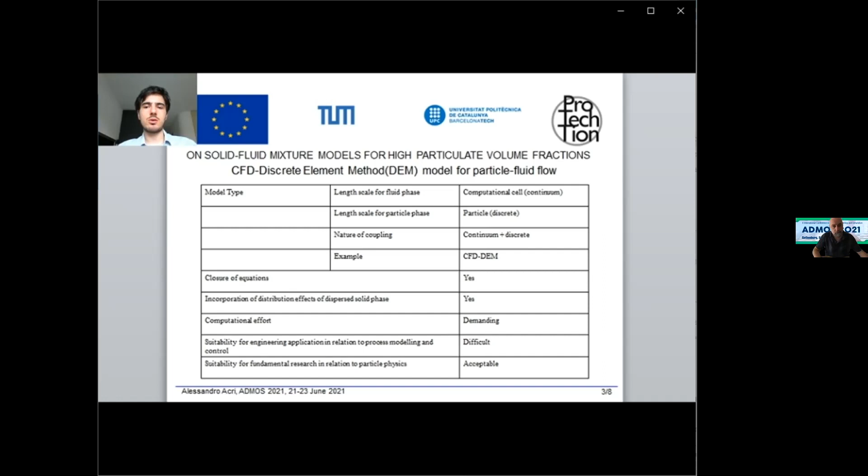In order to tackle this type of particle fluid flow problem, I've considered the CFD-discrete element method coupling model. This type of model considers the fluid as a continuum and the particles as discrete particles. It is a suitable model to describe the particle physics better than other approaches like the two-fluid method that considers particles as a continuum. Its computational effort is demanding, but less demanding than other approaches that consider particles as discrete particles. Therefore, it's a sort of compromise method.

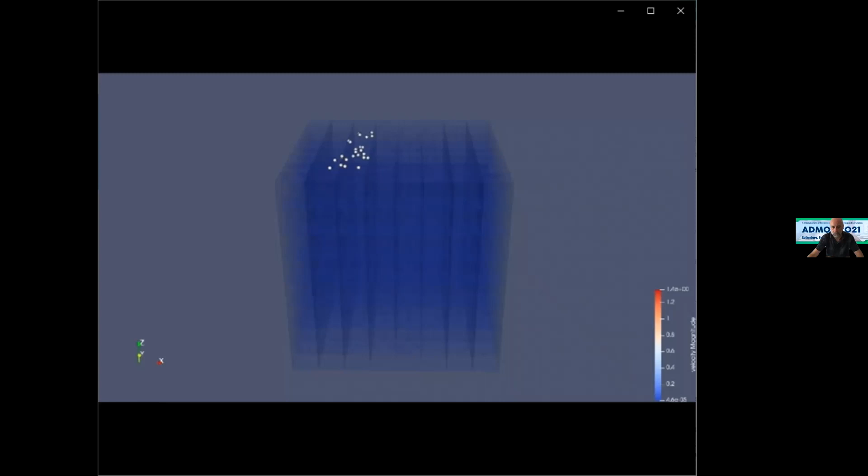Now I'm going to show you a brief video. In this video you will see how particles behave in a cubic domain, entering from the inlet, and we can see all the challenging aspects I've talked about, like the deposition of particles, the bouncing on the walls. We can see also how the contact between particles is performed, and the influence between particles and fluid. At a certain point, we see an increase of particles inside this cubic domain, resulting in an increase of particle volume fraction, which is also a problem. We can see this instability where particles are packed at the outlet, and then at the end we can see also the deposition of the particles.

Now we can go back to the presentation, and I'm going to present the conclusions I've reached so far and the outlook for the future. A CFD-DEM coupling approach to solve problems involving gas-solid mixture models is performed.

I've also performed a qualitative assessment, and we can see that the behavior of the particles is highly influenced by the fluid flow, as expected. I've also performed different scenarios that show how the approach can describe the particle physics.

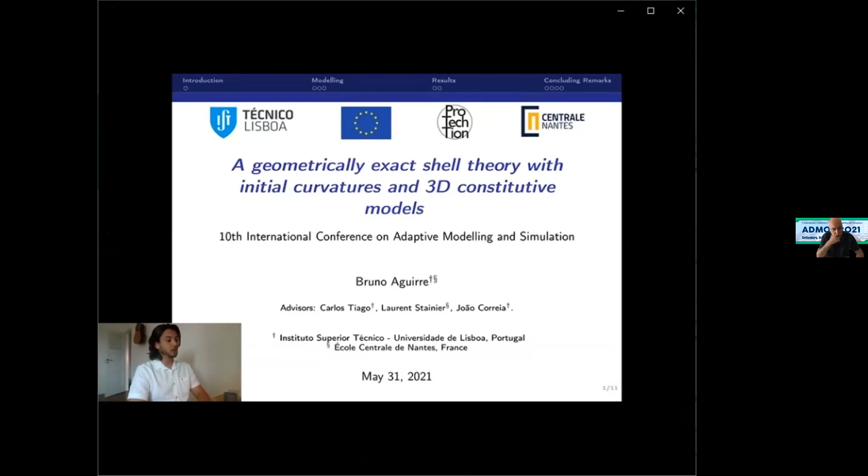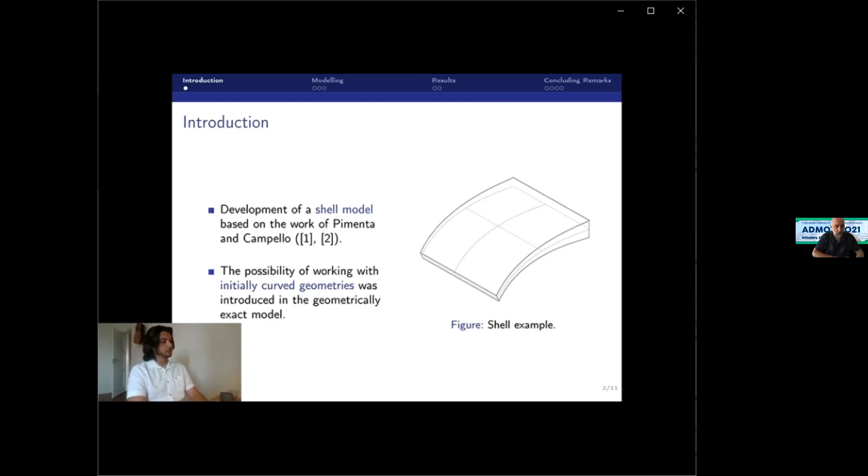Pimenta and Campello, back in Brazil at the University of São Paulo, developed this shell model, which is geometrically exact and also has thickness variation. We introduced the possibility of working with initially curved geometries, which was not possible before.

This new feature is implemented by the introduction of a new initial configuration. Using this initial configuration, we create a flat reference configuration where all the calculations are performed, because it's easier to work with a flat geometry in this case.

We have a mapping between the reference and the initial configuration of Kirchhoff-Love type, so basically the rotations are completely coupled with the basis. The total mapping is of Reissner-Mindlin type, and of course it includes thickness variations.

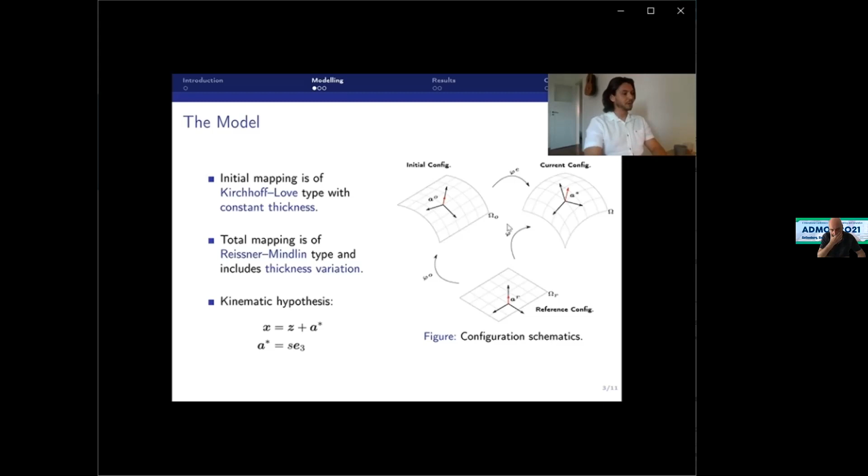The kinematic hypothesis is described by these two equations here. X represents the position of the current configuration, where Z and A-star, respectively, are the midplane position and the position of the director. The parameter S in the second equation controls how the thickness varies in this problem.

Here are some important model details. Of course, it works with large strains and it's geometrically exact. The rotations are parameterized with the three-parameter Euler-Rodrigues formula, which is interesting when compared, for example, with quaternions, where you have 4 parameters. The thickness variation is controlled by a quadratic equation.

You're going to have a linear and a quadratic term controlled by two parameters, P and Q, which are the degrees of freedom, and they are responsible for two types of thickness variation. P is responsible for stretching and diminishing of the thickness of the midplane, and Q is responsible for the displacement of the midplane with respect to the thickness.

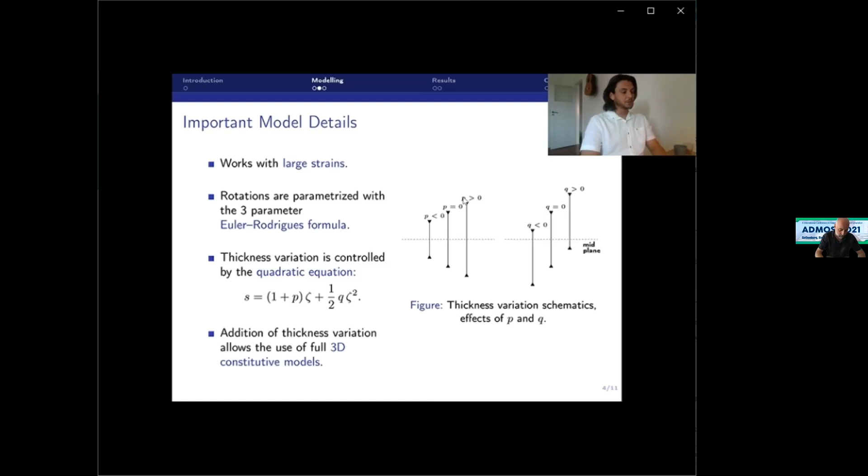One of the most important features of this model is that the thickness variation allows the use of full 3D constitutive models. Here are some implementation details.

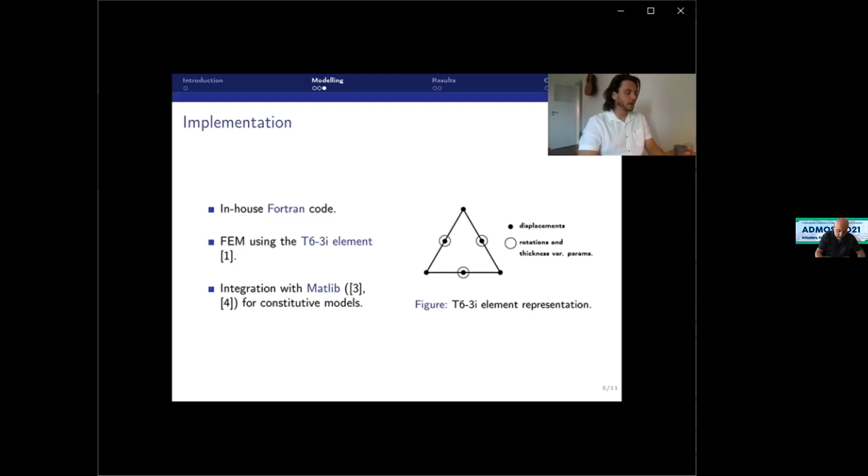The model is implemented in an in-house Fortran code, in a finite element context using the T6 3i element. This element is quadratic on displacement and linear on rotations and thickness variation parameters, to avoid shear locking. It's integrated with MATLib, a library developed by Professor Laurent Stainier, which has a variety of constitutive models. Now let's see how the model performs.

We have this pinched cylinder example. We're going to use the viscoelastic Ogden-Ogden-type constitutive model. You can check this reference for all the details of the constitutive model. We'll also be using the same material parameters as in the paper, so it's easier to do comparisons.

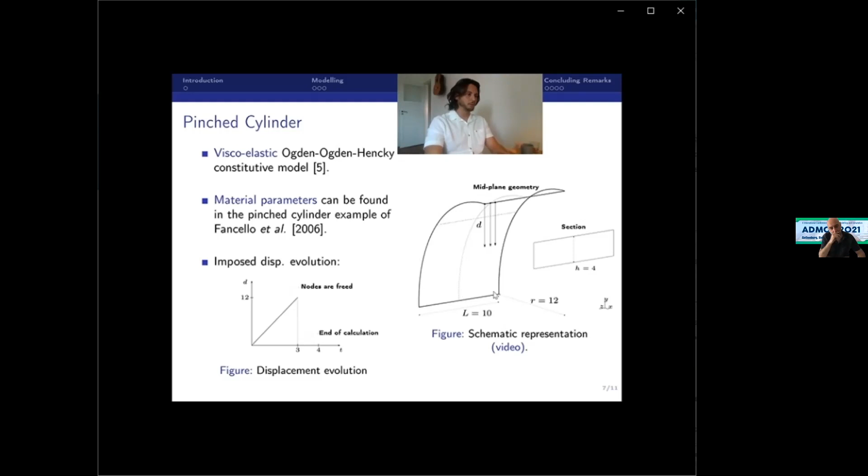This is the imposed displacement evolution. It's time dependent, evolving linearly until time equals 3, and then we free the nodes, and as a viscoelastic model, it should not go back instantly to the original position. This is the geometry here. We have symmetry conditions along this line and this line, so we don't need to solve the whole problem because it's symmetric.

So here is the video. As you can see, until time 3 the imposed displacement is acting. When it reaches time equal to 3, it releases and then slowly returns to the original position, as it should in a viscoelastic model.

So in conclusion, we presented a geometrically exact shell model which considers thickness variation and is able to work with initially curved geometries. The model is already implemented and is giving accurate results when compared with the benchmark tests.

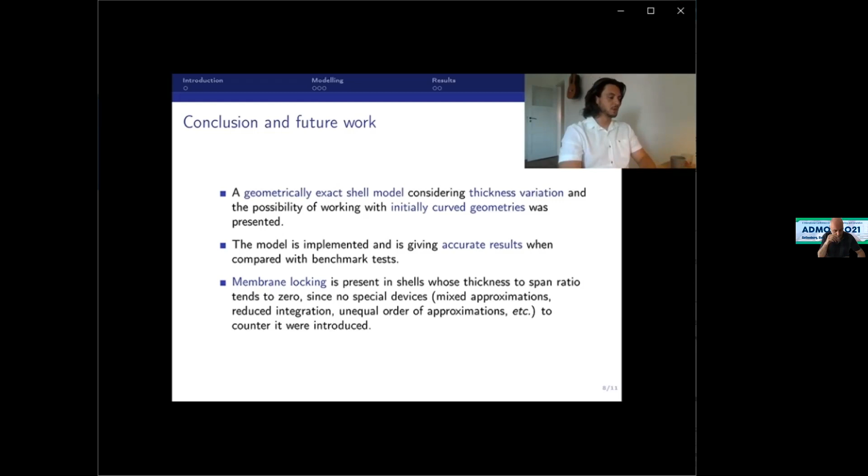As future work, there is a little bit of an issue of membrane locking, which is appearing in some cases, not all of them. Basically, this implementation doesn't have any special device to counter this kind of locking, for example, mixed approximation, reduced integration, or unequal order of approximations. So this would be an interesting future work.

Fluid structure interaction is a multiphysics type problem that earned increased attention during the last two decades. Several engineering applications rely on FSI simulations to solve different industrial problems in many fields such as aerospace, civil engineering, biomedical application, etc. Such type of interaction requires specific numerical methods to tackle different situations and might be computationally challenging due to the physics of fluid, nature of interaction between the solid and fluids, and structural properties and geometry.

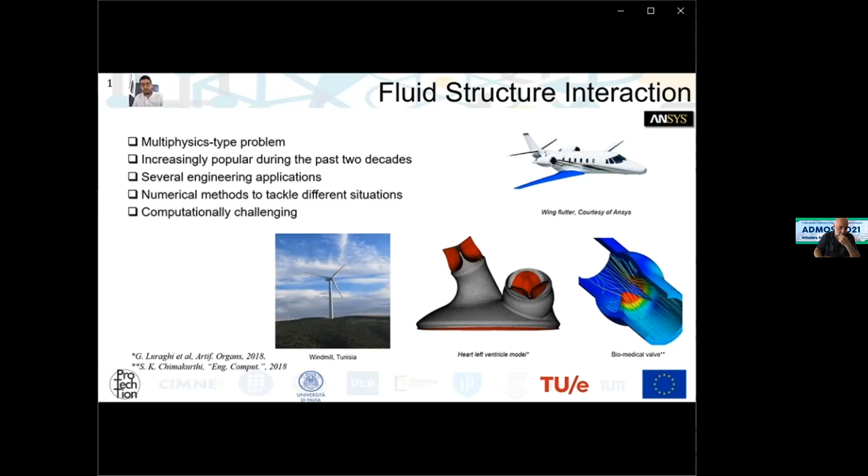In other words, FSI is problem dependent and generally needs fine-tuning with respect to the complexity of the task.

The partitioned approach is the most popular approach since it preserves the modularity of the participant solvers and allows independent setups that can be coupled using an intermediate coupling solver. This approach performs well when solving two-way fluid structure interaction problems with compressible fluids or low added mass effects.

However, it might be unstable for incompressible material coupled with soft, lightweight structures, which requires additional effort to obtain a problem solution.

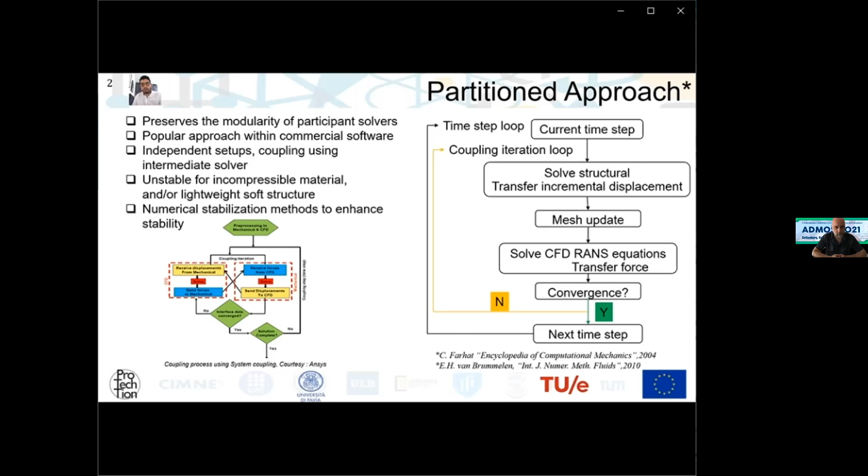This is the case of our valve under investigation, which is a two-stage pilot valve manufactured by our industrial partner Dolphin Fluidics, a company based in Milano, Italy. Simulating the operating condition, namely the opening and closing, is quite challenging because of the different non-linearities present within the system, besides the contact and the nearly closed configuration.

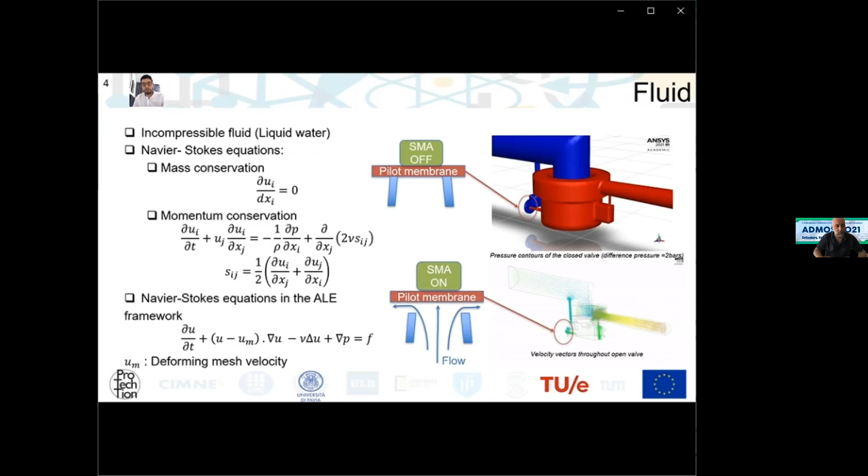We would like to solve this specific problem the hard way: assume an incompressible water flow governed by Navier-Stokes equations, which follows the arbitrary Lagrangian Eulerian formulation to allow the deformation of the fluid grid adjacent to the structure.

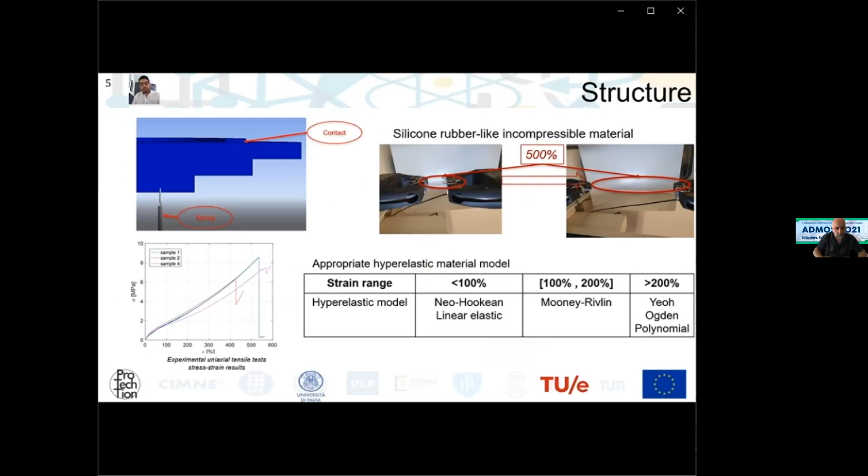The structure itself, which is made of hyperelastic silicone rubber, is modeled using the neo-Hookean hyperelastic material model and discretized using mixed formulation to account for volumetric and shear locking.

Traditionally, people solve partitioned FSI problems in an iterative manner using Gauss-Seidel fixed point algorithm. This method cannot deal with our specific model due to the high added mass effect and requires under-relaxation to stabilize the fluid acceleration. However, choosing the appropriate under-relaxation factor depends on the fluid to solid density ratio as well as the model specification.

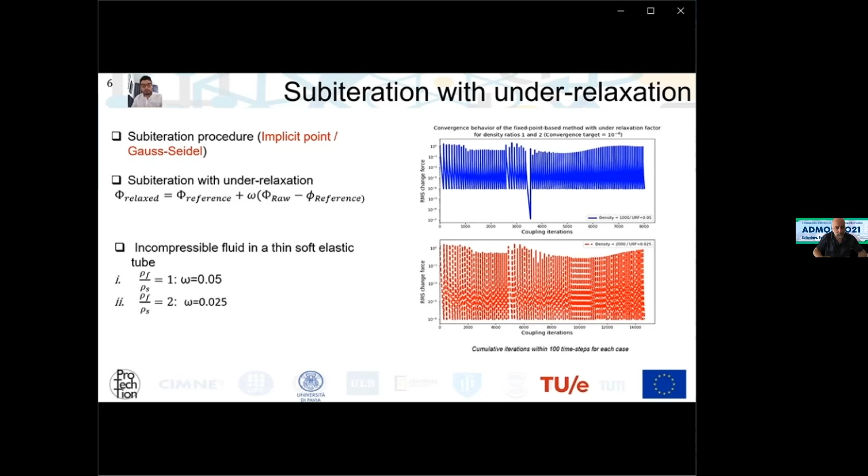Recently, the quasi-Newton method has been developed to tackle this specific kind of problem and has proven to be a robust and efficient way to couple partitioned FSI problems. It offers an alternative to Gauss-Seidel schemes and is based on the root finding method for black box solvers.

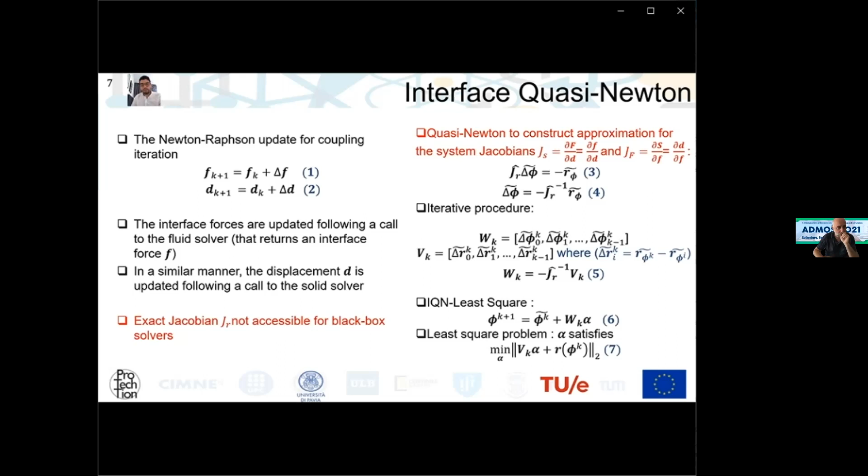This method does not solve the exact Jacobian of the Newton method explicitly because of the limitations of the black box solvers. However, it approximates the inverse of the Jacobian in an iterative manner until time-step convergence.

This method offers considerable acceleration to our simulation run compared to the sub-iteration with under-relaxation. It can also effectively deal with contact nonlinearities and tends to produce good results in comparison with the well-known exact Newton procedure.

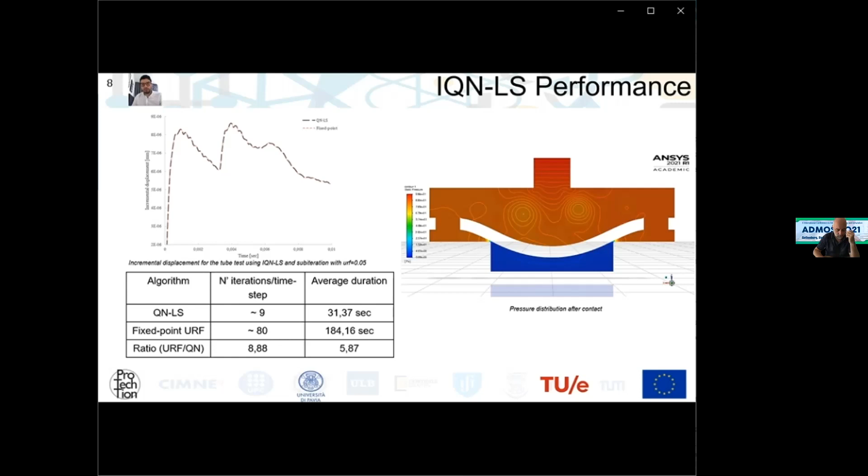Another method employed by some scientists, assuming artificial compressibility within each time-step iteration, has been an alternative to solve our model. In this method, a source term is added to the continuity equation of the incompressible fluid as a function of pressure variation. This pressure variation vanishes once the time-step solution converges.

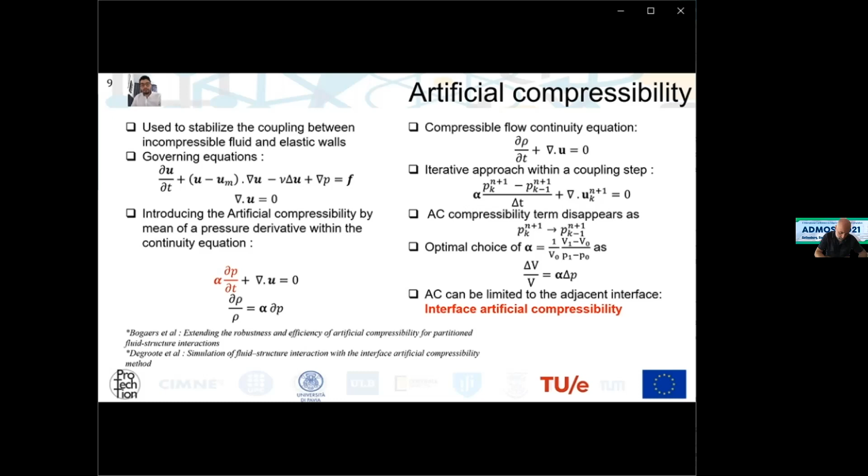This method can outperform the interface quasi-Newton least square method in some situations. It can also be limited to the adjacent wet interface to become interface artificial compressibility.

To conclude, fluid structure interaction simulations have become increasingly popular in engineering applications. However, it's very problem specific and requires fine-tuning to deal with challenging bottlenecks like added mass effect and nearly closed system for incompressible fluids. Stabilization methods have been introduced to deal with these challenges, like sub-iteration with under-relaxation, interface quasi-Newton method, and artificial compressibility.

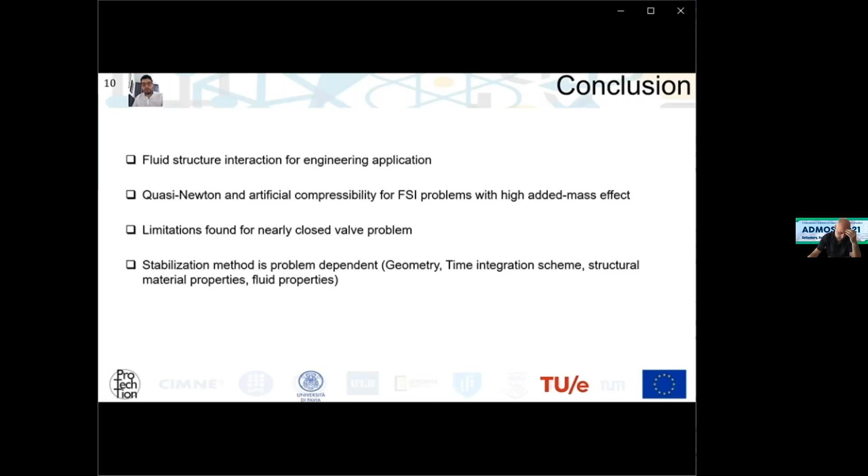Additional efforts are still required to deal with different sources of nonlinearities and need a proper understanding of the problem specifications. Finally, I would like to invite you to check out the extended version of this talk in Scipedia for your consideration. Thank you very much for your attention.

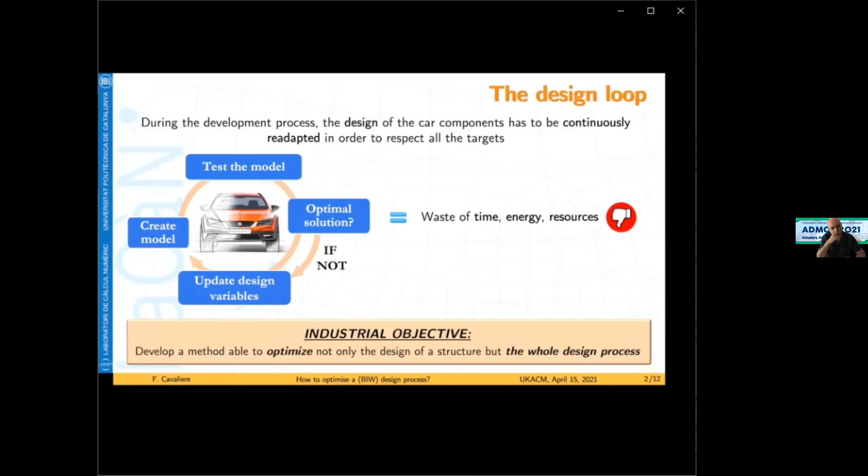Hello everybody, I'm Fabiola Cavaliere and I'm a PhD student. With my project I'm trying to understand how we can efficiently design a new car. The design process is the most time-consuming part of the whole project because it needs a lot of iterations until the best solution is found. This of course represents a waste in terms of time, energy, resources, which is the reason why the industry needs to optimize the design process itself.

In my project, I'm focusing on one target specifically, which is the noise and vibration response of the vehicle, a target which depends on the static and dynamic properties of the structure, and it is very sensitive to variations in the design parameters. The problem here is that by adding design parameters to our problem, we increase its dimension, so we define a high-dimensional problem.

And when we employ standard numerical methods, we need to test many configurations. Actually, we need to run a computation for every combination of the parameters. And this is too expensive in real industrial applications.

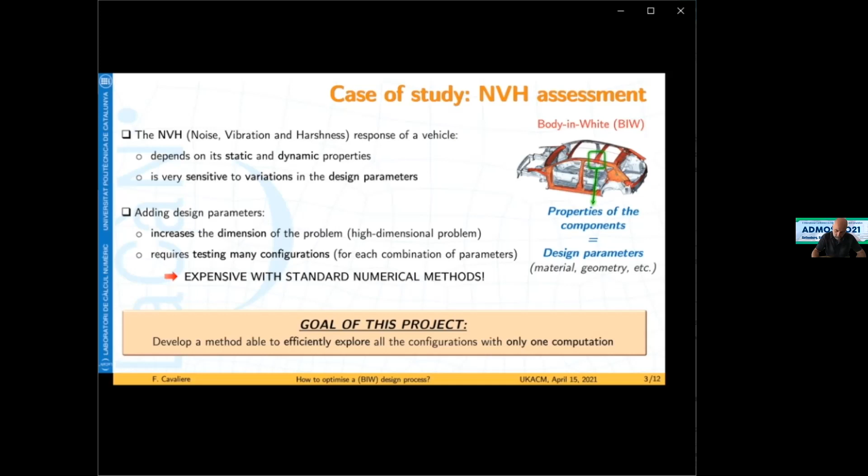Our goal in this project is to develop a method able to efficiently explore all the configurations with only one computation. This is possible thanks to the reduced order methods, which are able to capture the essential feature of a problem in an acceptable amount of time and with limited storage capacity.

In this work, we use the proper generalized decomposition method, which presents several advantages. First of all, no previous knowledge of the solution is required, and also it computes a computational vademecum which contains all the possible solutions for every combination of the parameters. Of course, this helps and makes much faster the post-process, which will help in the decision-making of the design.

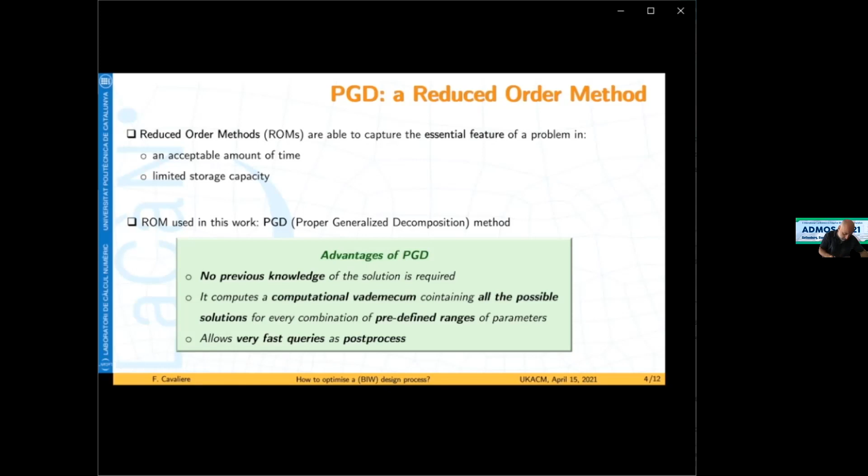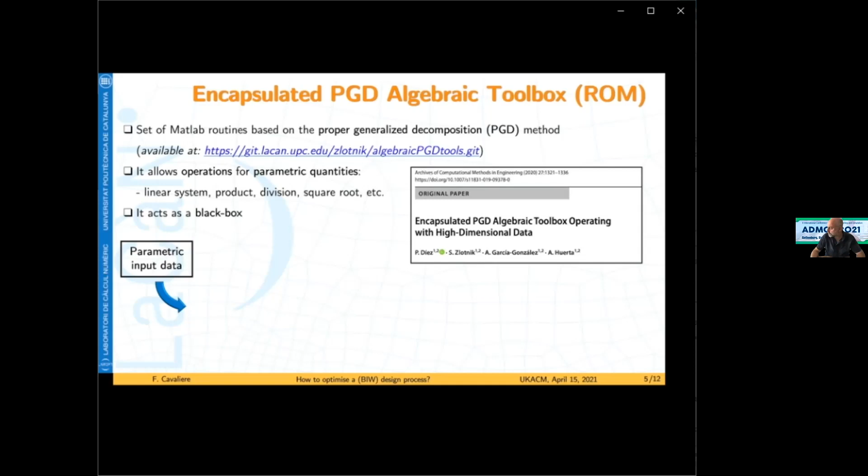Specifically, I've used a PGD-based encapsulated algebraic toolbox, which was developed in my research group at UPC in Barcelona, which is a set of MATLAB routines able to perform operations between parametric quantities. The main feature of this toolbox is that it can act as a black box, in the sense that the user only needs to prepare the parametric input data, give it back to the encapsulated PGD toolbox, and receive the parametric solution.

By assumption of the PGD method, this solution is defined as a sum of terms, where each term is given by the product of functions depending on the introduced parameters. As a consequence, the post-process is very easy and fast, because the results for a specific choice of the parameters can be obtained in real time by simply performing linear combination of functions.

So this result can be uploaded on a tablet, for example, and by simply scrolling on the values of the parameters, we can see in real time how the result will change.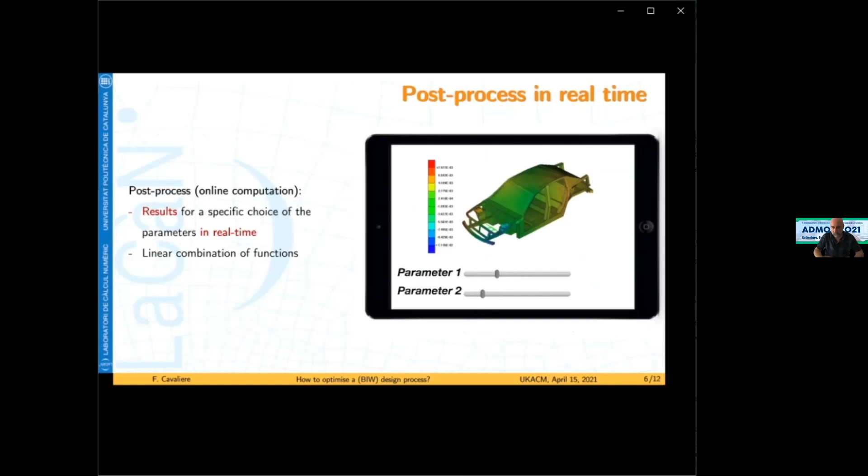So we applied this methodology for the parametric NVH study, which basically consisted in solving a static parametric problem and a dynamic parametric problem. Actually, the dynamic problem in terms of generalized eigenvalue problem, in order to extract the mode shapes and the frequencies associated to the structure.

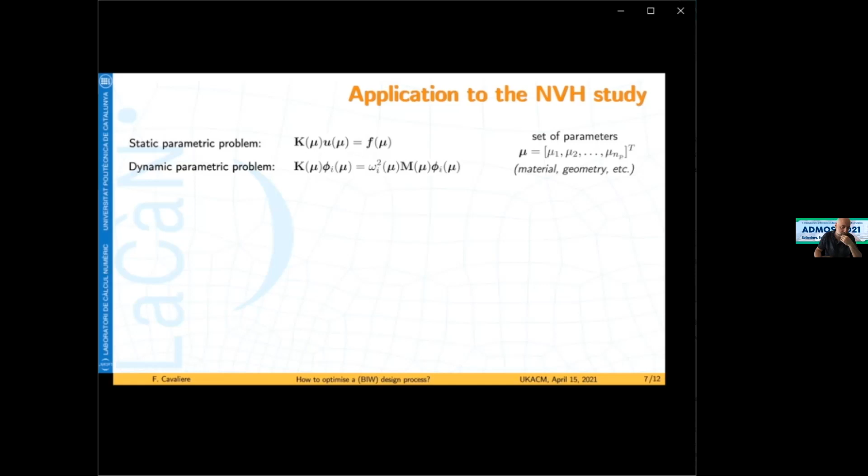Several challenges were faced during this project because, first of all, for example, we needed to couple the PGD with the inertia relief technique, which is a technique able to solve the static analysis of unconstrained structures. In fact, during the NVH test, the car is assumed to be unconstrained.

We developed a parametric eigensolver by coupling the PGD with the inverse power method in order to extract the mode shapes and the natural frequencies. And very importantly, we're able to develop an algebraic approach which allows to consider complex geometric parameters, which is usually a limitation in the PGD method.

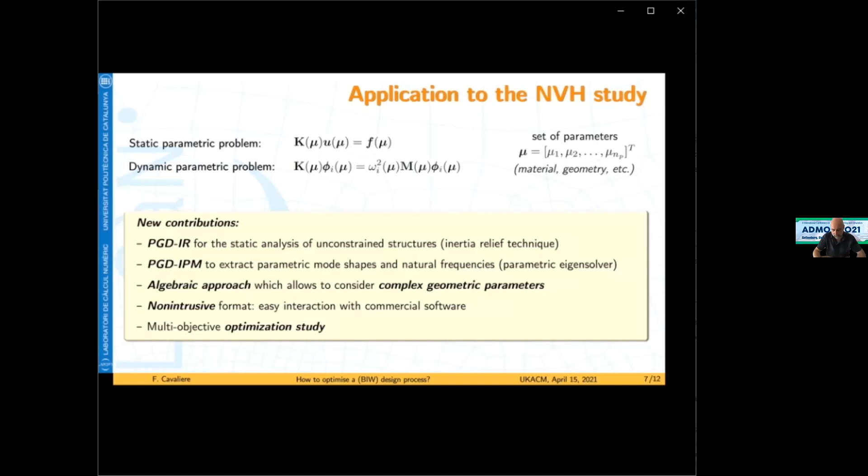Everything was made in a non-intrusive format in order to permit an interaction of the method with commercial software, such that the industrial application is possible. Also, we were able to perform multi-objective optimization study, which is fundamental during the design process itself. Let me show you a numerical test where we solved the parametric modal analysis of a dummy car.

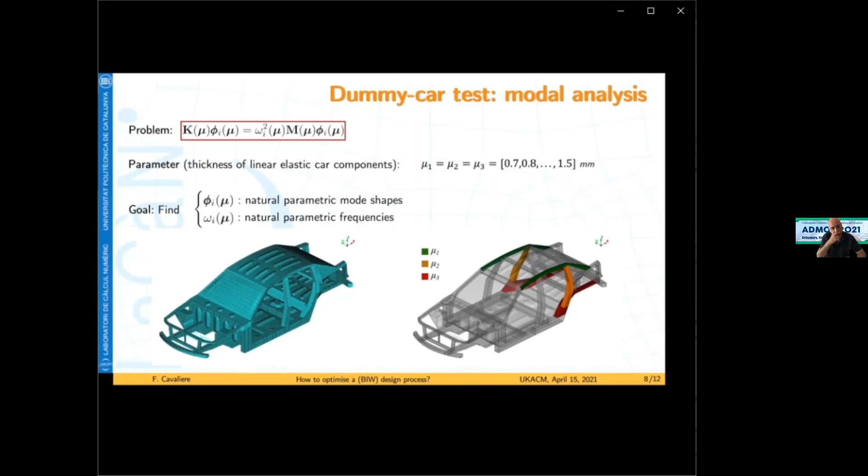The parameters are the thicknesses of 3 car components, and by means of our tool, we were able to extract the parametric mode shapes and frequencies. Here, in terms of result, you can see how the first 3 frequencies vary inside the parametric domain.

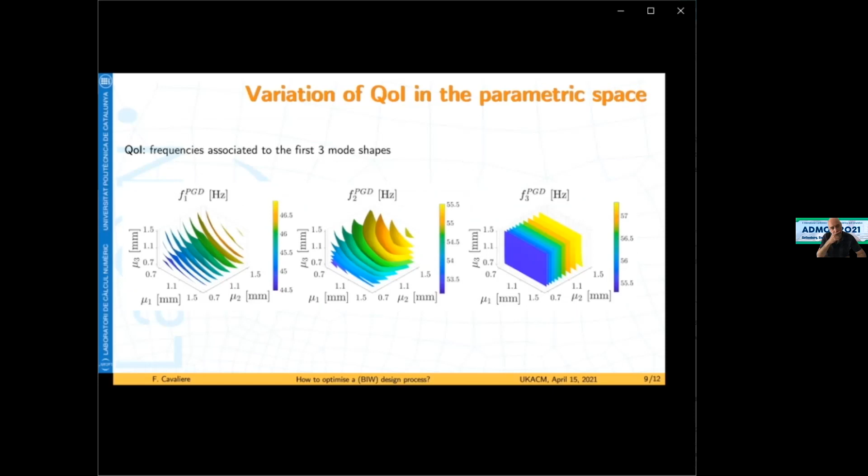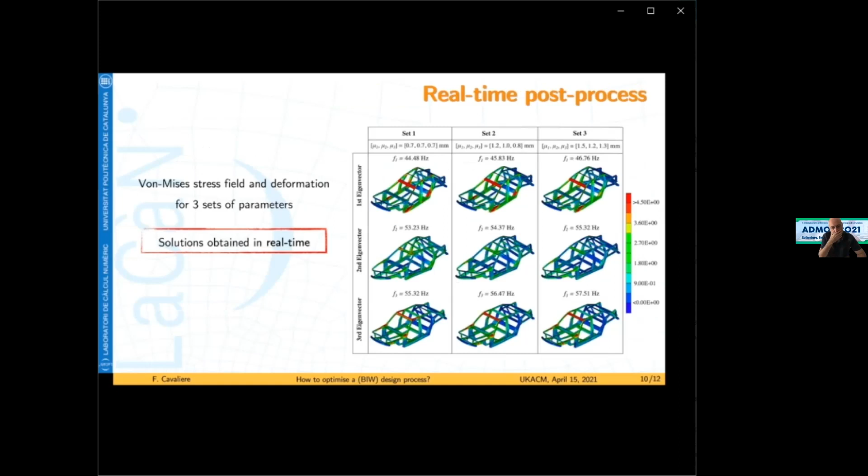Also, in real time, it is possible to obtain specific solutions for precise sets of parameters. Multi-objective optimization problems can be solved where, for example, we minimize the mass of the parametric car components by maximizing the frequency associated to the torsional mode.

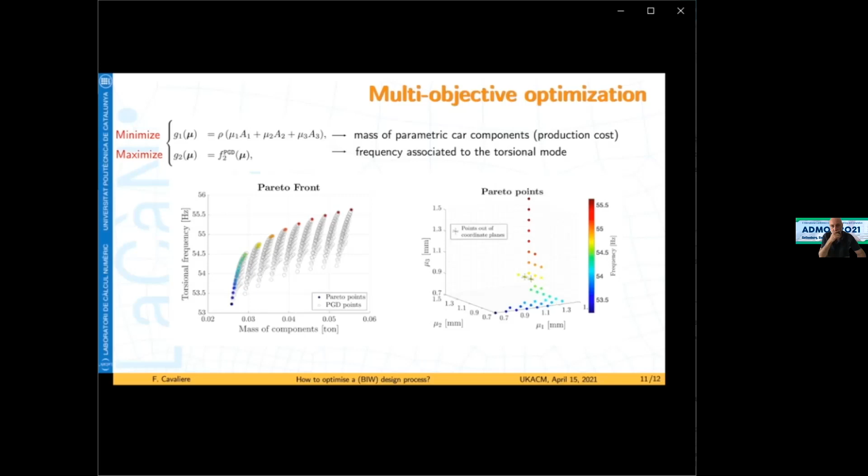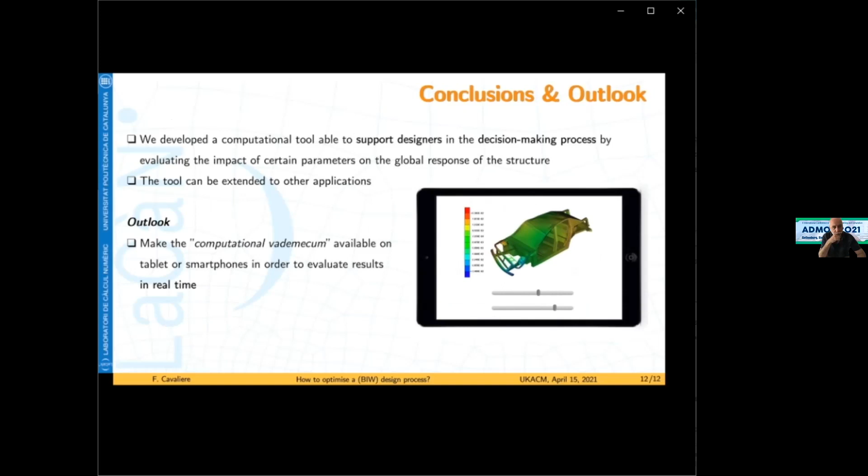You can see the colored points representing the optimal solutions, which are much less than all the possible configurations represented by the empty points. In conclusion, we developed a computational tool which is really able to support designers in the decision-making process. Thanks for your attention.

Hello. Let's look at how we can model water transport in paper sheets through computational modeling. My name is Nick Dave, and I work with Ron Peerlings, Thierry Massart, and Marc Geers from Eindhoven University of Technology and ULB Brussels. This research work is part of the MSCA Horizon 2020 European Joint Doctorate Program.

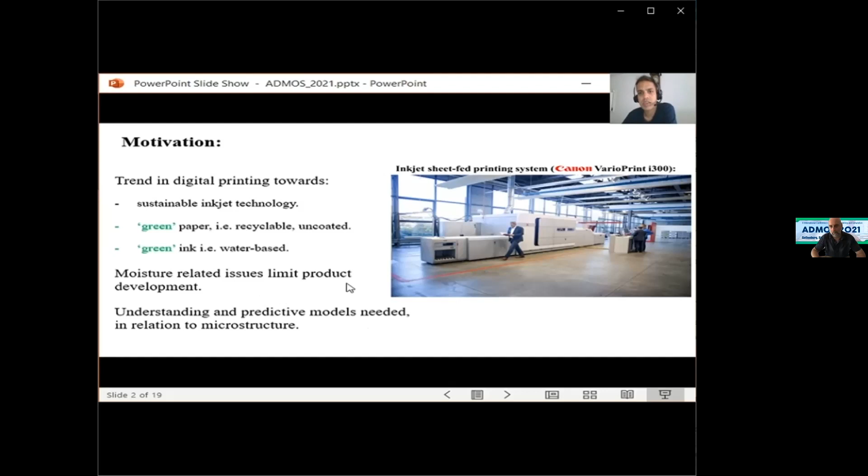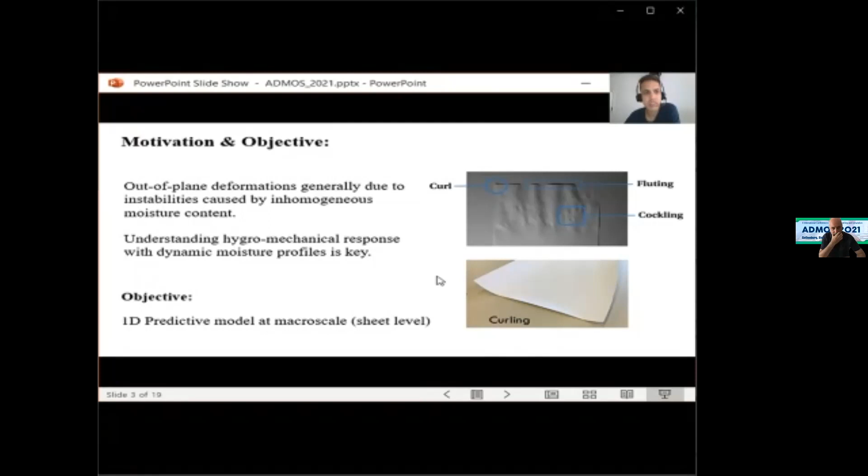Dimensional instabilities are usually caused by inhomogeneous moisture profile along the thickness of a paper sheet, and therefore we need to take into account the dynamic moisture state to reach our objective of developing a one-dimensional continuum model. This model is at the sheet scale.

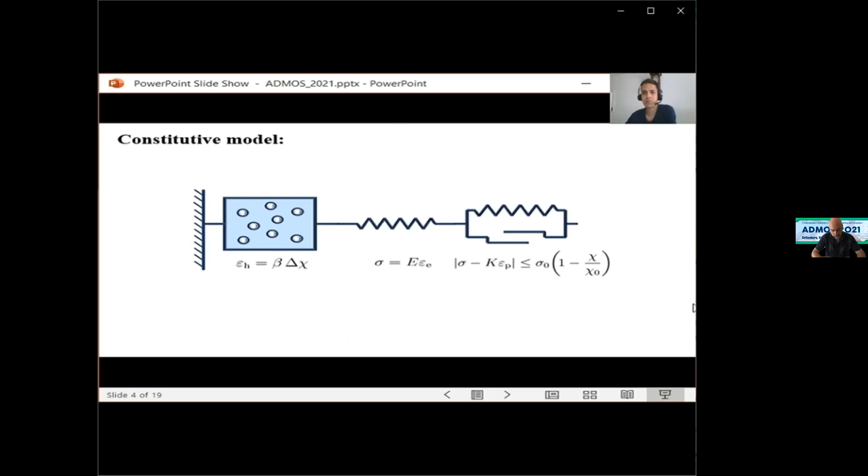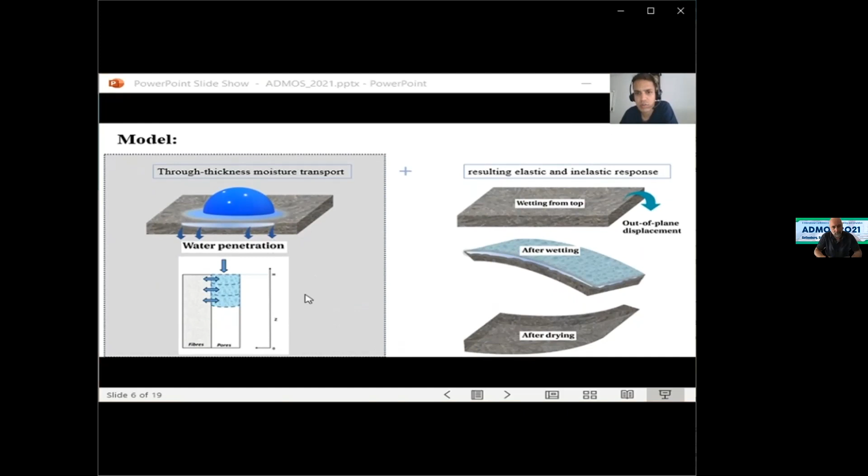We use a certain driving force in this mechanism. We call it capillary suction. This is given simply by an inverse relation between the radius of these capillary tubes and the capillary pressure.

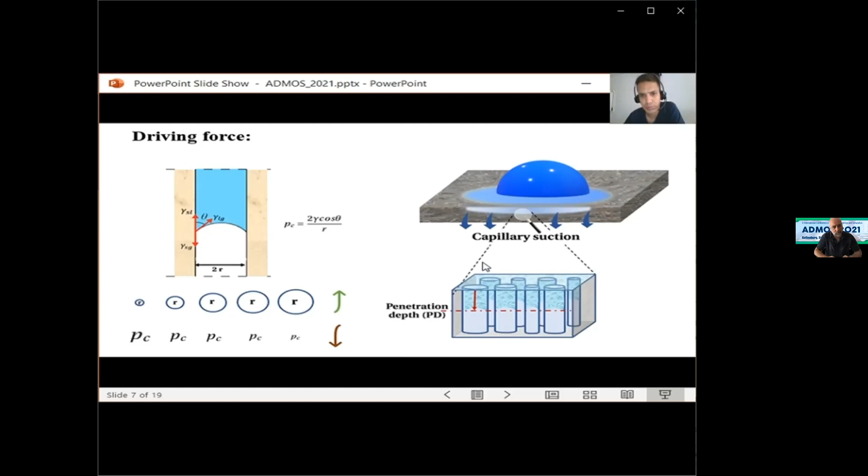The resistance to this flow is caused by the permeability, which has a square relation to the radius of these tubes. We also use the concept of saturation here, which gives us the volumetric water content in the porous medium.

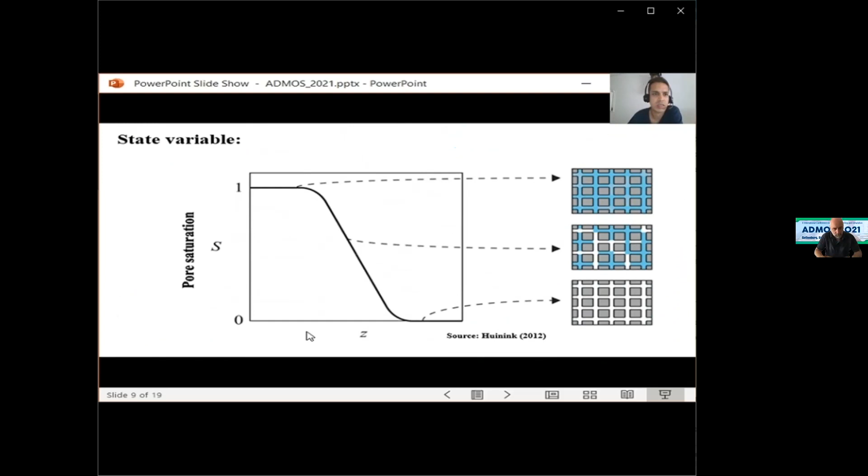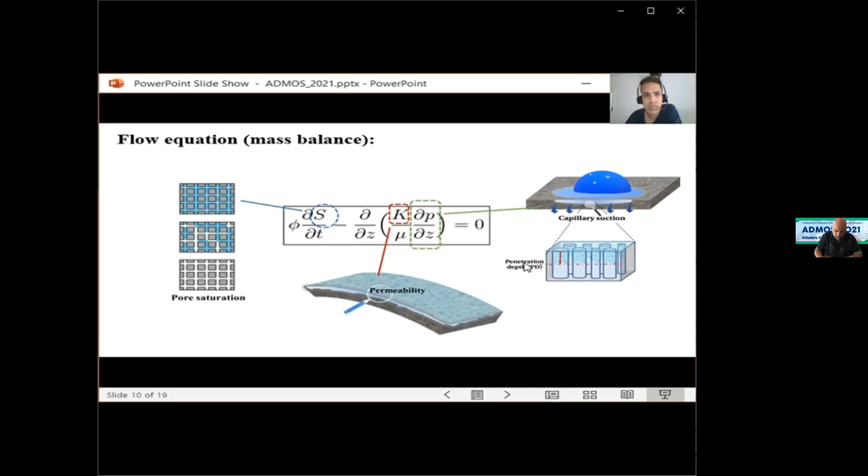So using the mass balance or mass conservation, we write the partial differential equation for the pore transport, which has the permeability, the capillaries, the gradient of the capillary suction, and the pore saturation. We also take into account the nonlinearity in this permeability and the capillary pressure.

In terms of saturation, we hypothesized the dual porosity medium, wherein we take into account the pore transport and the fiber transport.

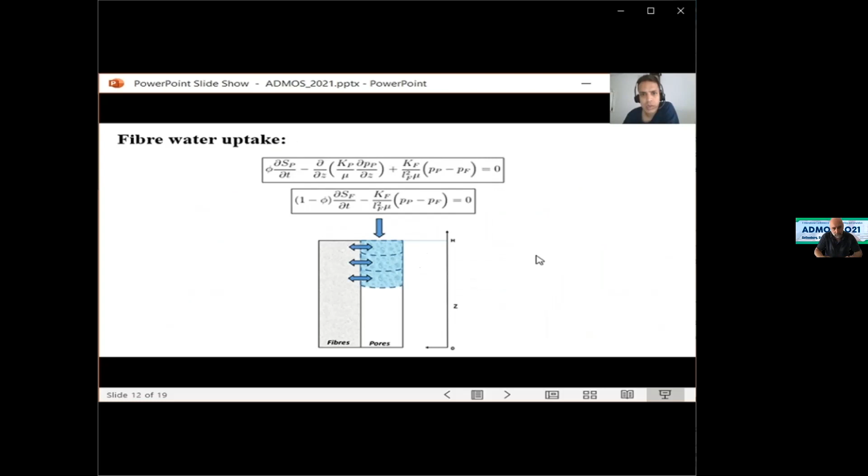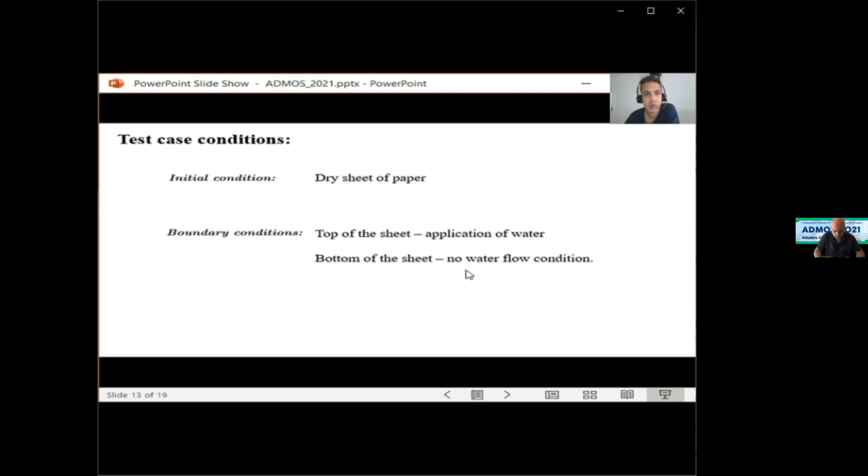Using a suitable boundary condition, we wet the dry sheet of paper from the top, and after a certain moisture has been applied, we apply a no flux boundary condition at the top of the paper sheet. At the bottom of the paper sheet it's always a dry condition, so it's a no flow condition. What we see here are two regimes, namely imbibition and redistribution.

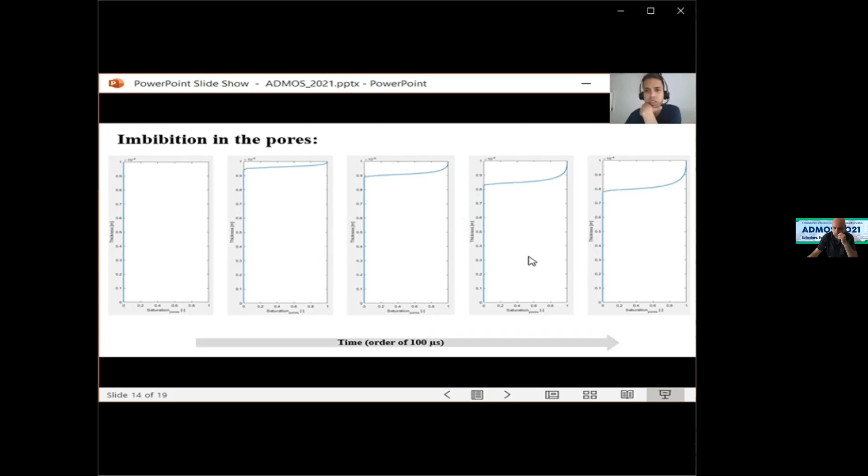You see the imbibition here, which goes through at a speed much faster, so it's in the range of milliseconds or 0.1 milliseconds. We also notice the redistribution regime, which is quite slow, and this is observed after we change the boundary condition on the top.

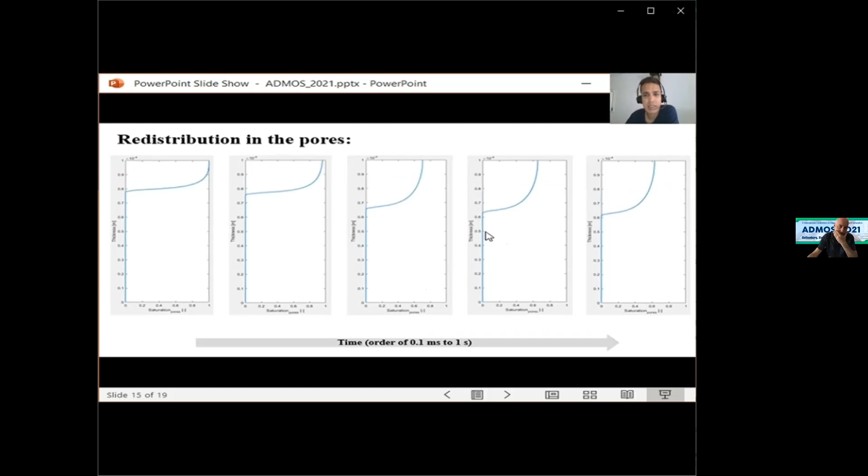These timescales help us to understand the fast pore water transport and the subsequent very slow fiber absorption regime, which you see in this image.

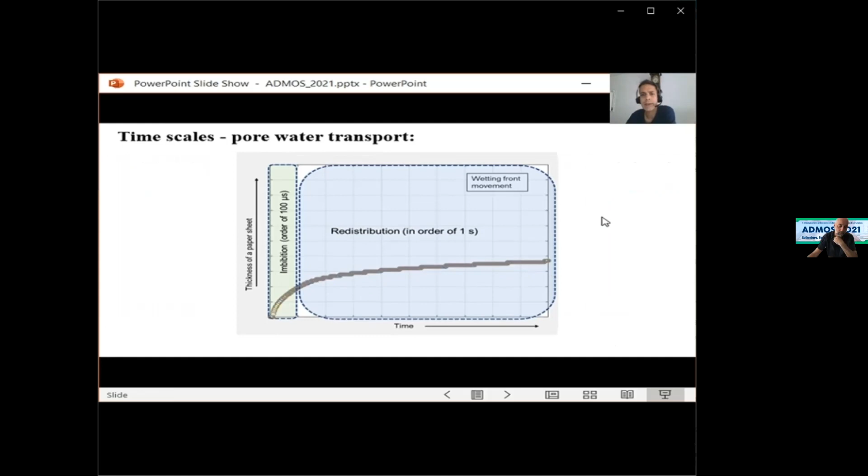So to conclude, we looked at how moisture-related dimensional instabilities could be modeled with computational modeling. Inhomogeneous moisture profile and plastic deformation seem to cause out-of-plane deformations, and the spontaneous imbibition is seen with the time-taking redistribution, which are related to the pore water transport and fiber absorption.

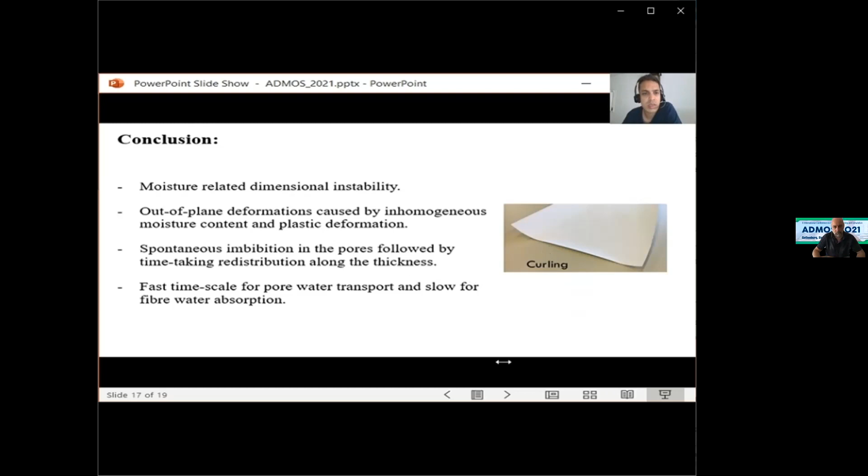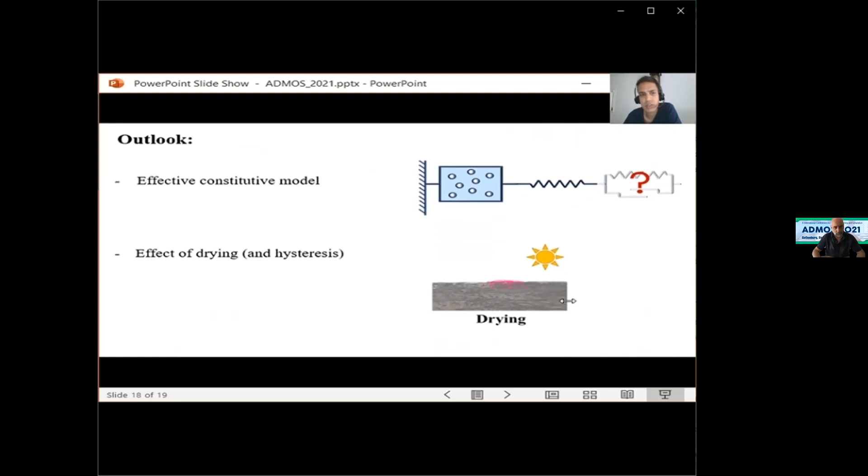There are certain things we want to look at in the future, to look at an effective constitutive model, and also the effect of drying and hysteresis.

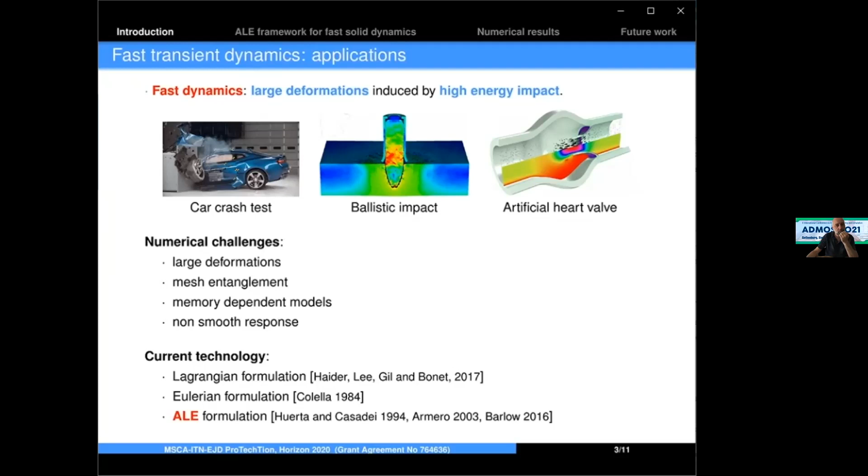The prevailing approach is total or updated Lagrangian, but applying the Eulerian approach would let us borrow techniques from CFD. Also, in the past years, the ALE technique, where the mesh and the quantity move in a complementary fashion, has gained popularity in computational structural dynamics.

Let's now move into the core of our framework and see its main features. We are using an ALE approach based on the composition of the natural deformation gradient. The material and spatial deformation gradients are solved instead of integrating the displacements. The integrations are now performed on the referential domain.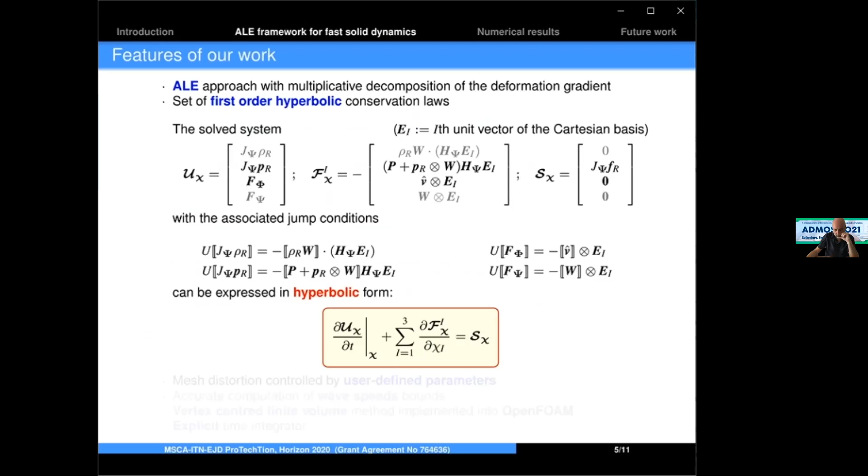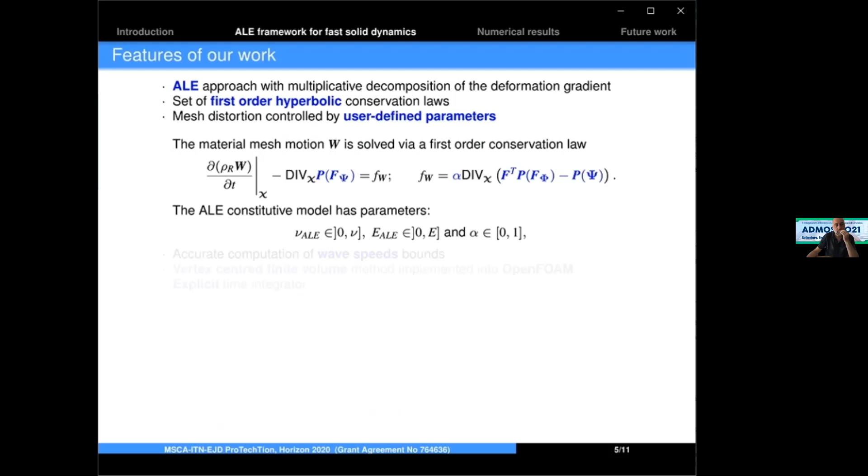The mesh is distorted via a conservation law and user-defined parameters. The material velocity is solved and its stress tensor is based on constitutive parameters to control the level of deformation. Note that this law is also hyperbolic. The wave speeds have to be rescaled using this formula because the integration is now performed on the referential domain.

The spatial discretization is based on the vertex-centered finite volume method and is implemented on OpenFOAM. The time integration is explicit, and the computation of the time step depends on the spatial stretch.

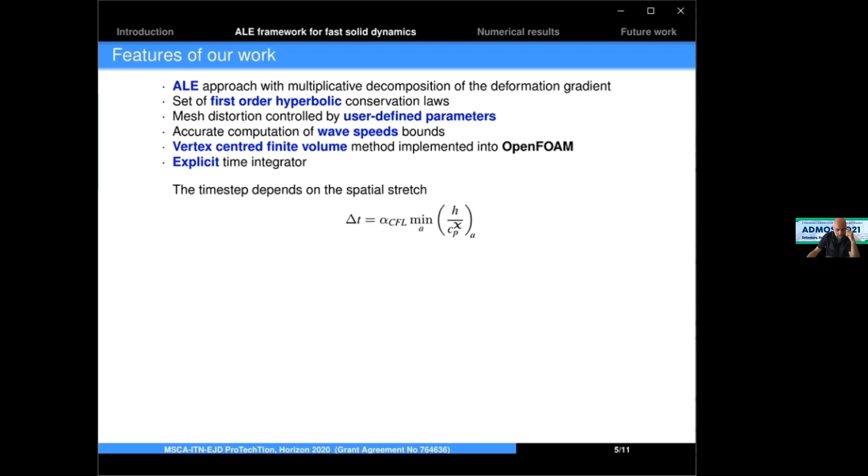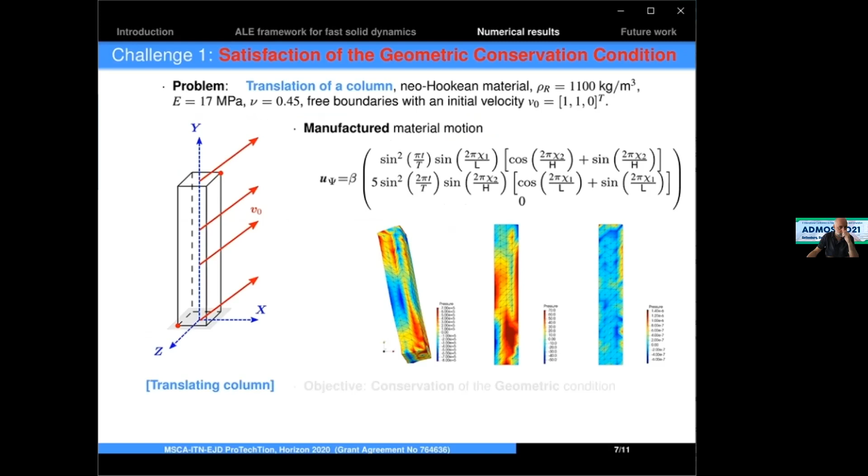Let's now review some numerical results. First of all, this translation problem highlights the role of the geometric conservation condition in an ALE context. As we can see on this graph, a satisfying computation of the pressure is achieved when we solve for the material deformation tensor F and Jacobian J.

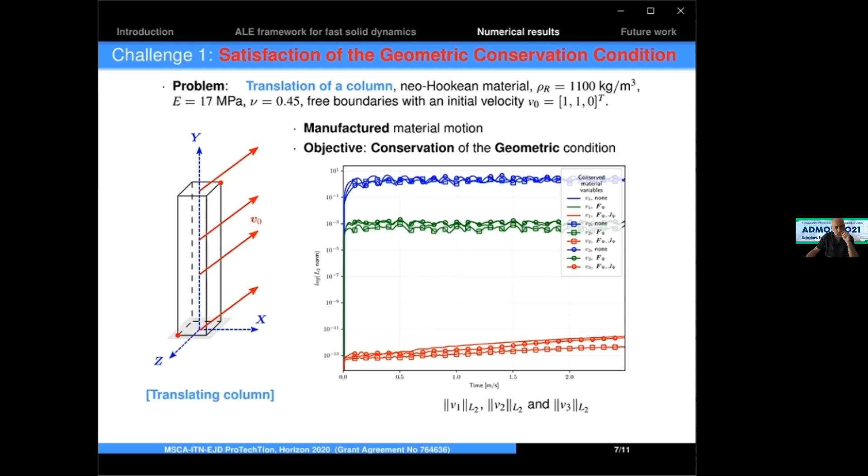A similar conclusion is drawn upon the velocity and the displacement. In this low-dispersion cube problem, a convergence analysis is done based on the following closed-form solution for small deformations.

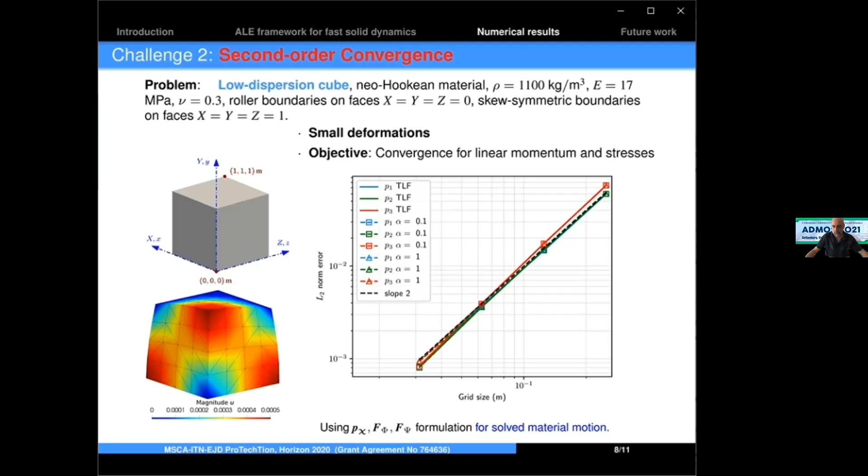If the material motion is prescribed to the same magnitude as for the spatial motion, a second-order convergence is achieved for the velocity components as well as for the stress, where the results are very similar to a total Lagrangian simulation. When the motion is solved, whether to a small or high intensity, the second-order convergence is maintained for the velocity and for the stress.

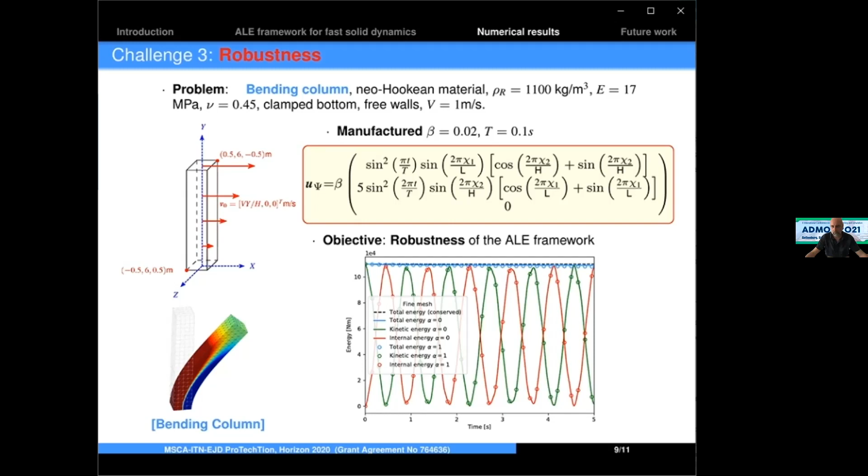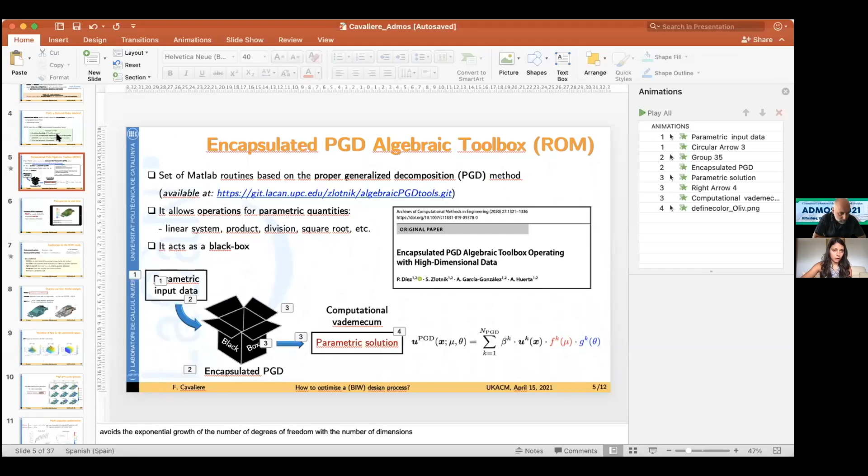Maybe I can share the screen a second to better explain that. So this is the slide you were referring to, and this is at the base of the proper generalized decomposition method. Let me show a previous slide. The idea here is that we have an output which depends on parameters, a set of parameters mu, and what I'm trying to describe is the dependency on these specific parameters.

Imagine, for example, in my application I'm considering a car structure. So the parameter might be the thickness of a car component, and this is something that the user, the designer, knows. He knows exactly what is the input, what is the parameter. He will vary this specific parameter in a certain range, so it's not random in this case.

The idea behind the PGD is that this quantity can be represented in a separated format, which means it is given by a sum of terms where each term depends on the parameters in a separated way, with an affine decomposition. So each function has spatial terms describing the physical space, and parametric functions that describe the dependency on the parameter.

And how do we compute that, if this is the question now? We have a solver scheme, typical of the PGD method, which is based on first computing each of these terms one by one. So some kind of enrichment of the solution. And for each term, we need to employ an iterative scheme, because you want to find this expression, which is a nonlinear problem now.

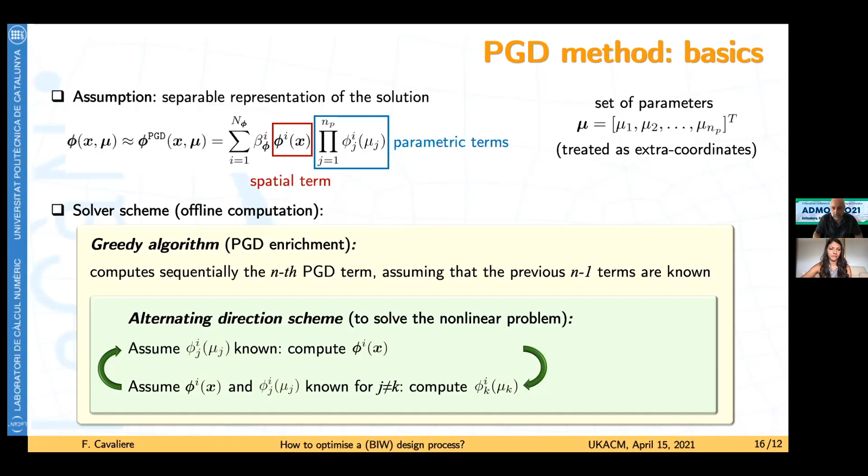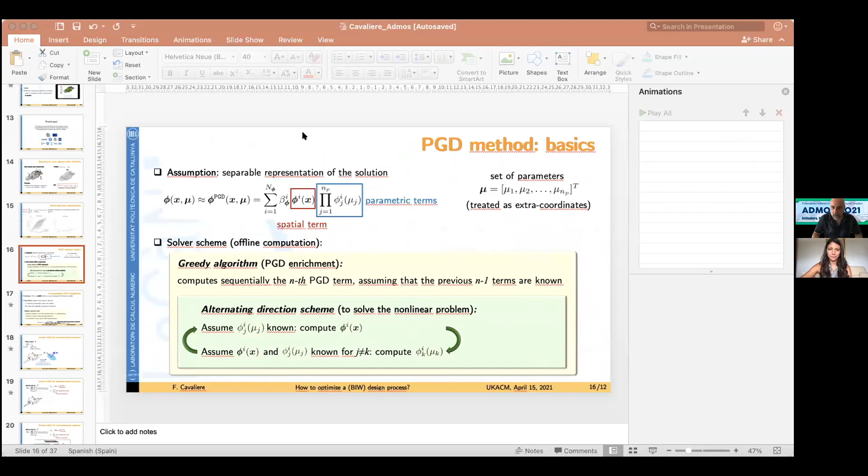I don't know if I've answered the question. Thanks Fabi for your answer. Okay, I'm going to move in the order of the questions.

So the next question is for Nick Dave from Christina. The question is: I didn't understand how to take into account or measure pore distribution. Is it a state variable or is it related to displacement in a microscale?

All right, yeah, hi, hello everyone. Can you hear me well, Sergio? Yes, yes, we hear you very well.

All right, so redistribution is actually based on the state variable saturation, which is the normalized water content at a certain material point. The hypothesis we have for the state variable is that we consider this bundle of tube model along the thickness, so parallel tubes along the thickness. We assume that the smaller pores, so the smaller tubes, are filled first, and then eventually the bigger ones.

However, these smaller tubes have a lot of friction, so the permeability of the bigger pores is much higher. So it's mostly like a zigzag pathway. The smaller tubes keep filling up at a material point, and the transport happens from the bigger ones. The bigger ones will transport to the smaller tubes, which are at the next material point, and then eventually this process will continue.

With imbibition, what happens is, because all the pores are completely filled, the permeability is high, so the bigger pores are constantly transporting water because there is an infinite amount of water. In redistribution, there is sort of a locking mechanism, because the water is kind of restricted in these small pores.